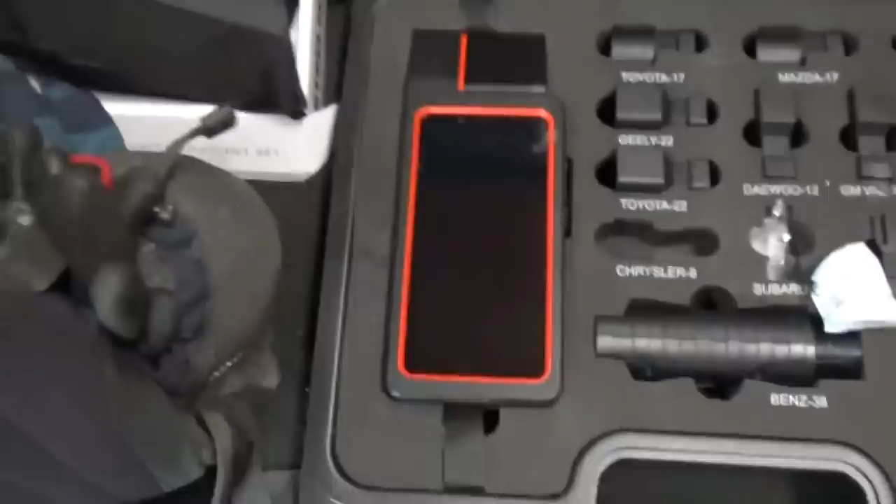So this thing looks like a cell phone - this is a Galaxy S9 Plus. This is the Launch X431, the Diagun IV. It comes in this nice case with all these adapters.

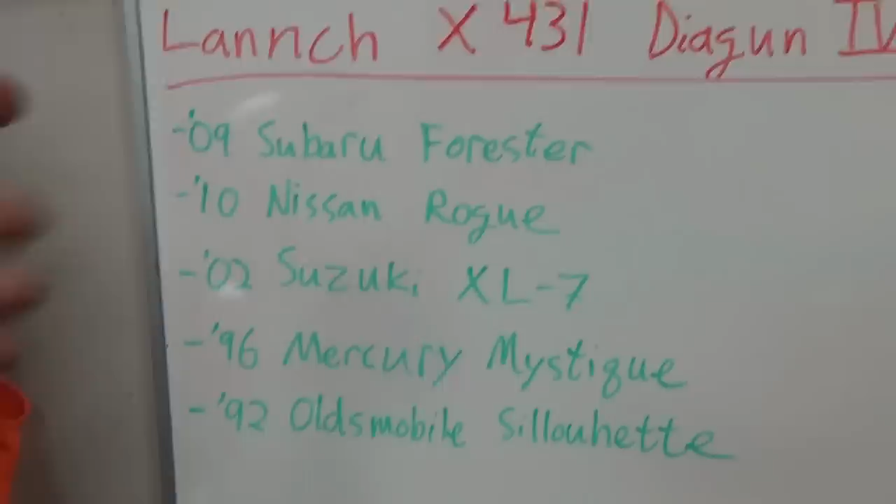Now, my question is, can you use this thing on something older than a 1996 vehicle? Because, like an Autel for example, it comes with the same adapters, but the software won't let you use it. So what I want to do is try it out on these five vehicles: a 2009 Subaru Forester, a 2010 Nissan Rogue, my own 2002 Suzuki XL-7, a 1996 Mercury Mystique, and a 1992 Oldsmobile Silhouette that's been parked in the lot for a couple months now. I haven't had time to get to it, but I'm wondering if the Launch can talk to an older GM vehicle, something older than a 96.

So let's get the scanner out and play around with it.

Alright, so it's exactly like a cell phone. It's an Android phone. You turn it on by holding that button. Here it's booting up. So we have a 2009 Subaru Forester here.

Artyom brought it over again. Yeah, this time the rear brake pads were seized. Just call it a lemon. Come on, it's a lemon. Okay, he calls it a lemon. It's here very often, but it gets some places. Hasn't left you stranded yet, right Artyom? No, not yet. Well, actually in Montana it did, with the clutch. Yeah, it did, of course. I learned from experience.

So, set the camera up on a little tripod here. The Bluetooth dongle is in this holster. Here it is, and it looks like a cell phone.

Pretty cool. So let's boot that up and find where the OBD2 connector is. Alright, here it is, so plug that in. It has a little light just to make sure you got power. Let's hop in and see what this thing can do. Let's have the key on. Alright, let's jump right in.

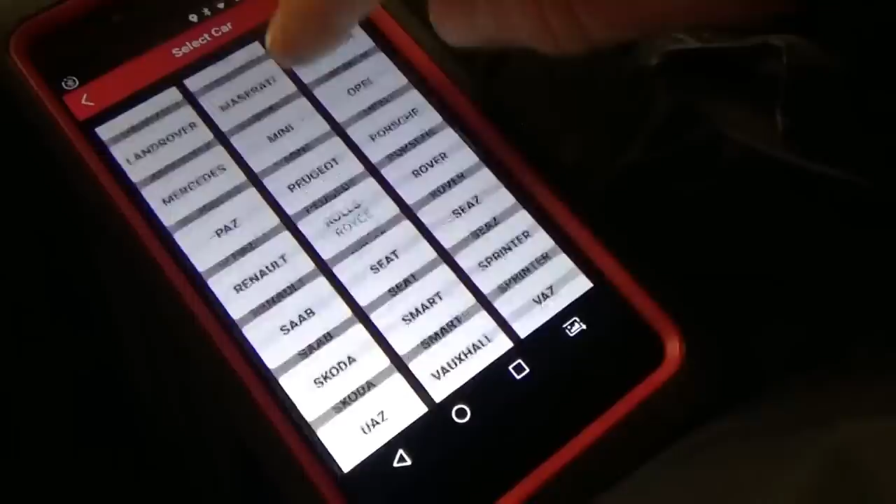Alright, diagnose. And so we've got common - these are like your most recent cars: American, European, and Asian. So let's go for Subaru.

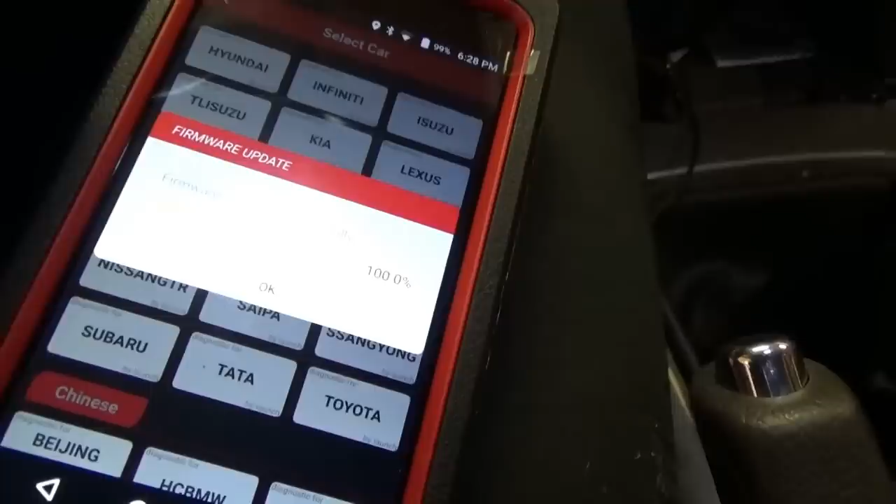Your firmware is updating. This may take several minutes. Please keep the connector powered up. Okay, so the first time you use it, it actually needs to update the firmware that talks to the Bluetooth dongle. It looks like it's going pretty quick. We'll be right back. Well, that took about a minute - firmware installed successfully. Okay.

So now it's going to talk to the car through the 16-pin socket. It read the VIN - Forester 2009, that is correct. Try to minimize the glare so you guys can see it. Let's see if you can hold it like this and poke around with your finger. System info - yes, correct.

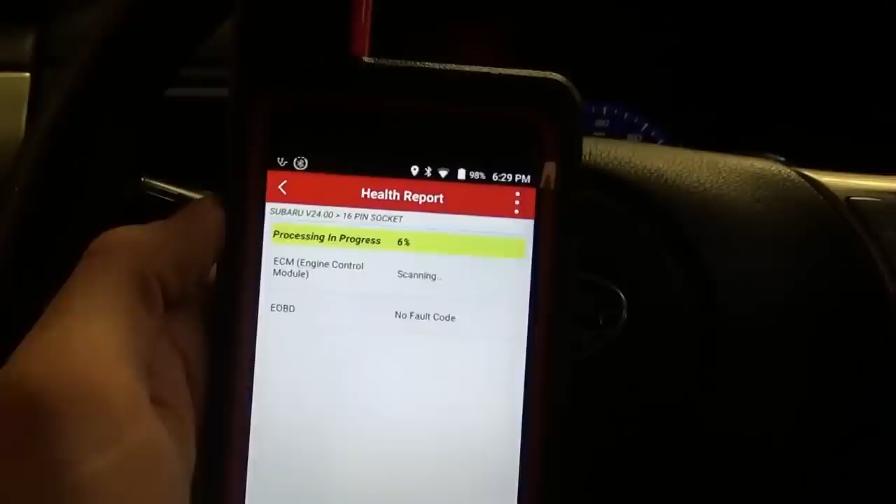Alright, health report, system scan, system selection, immobilizer, advanced function. I don't know, let's start with the health report and see what that does. Okay, so this is kind of like the Autel, scanning every module in the vehicle. I'm wondering how long it's going to take on a Subaru, which is the base model - it doesn't have 100 computers in it, it should have like 5 or 10 or something.

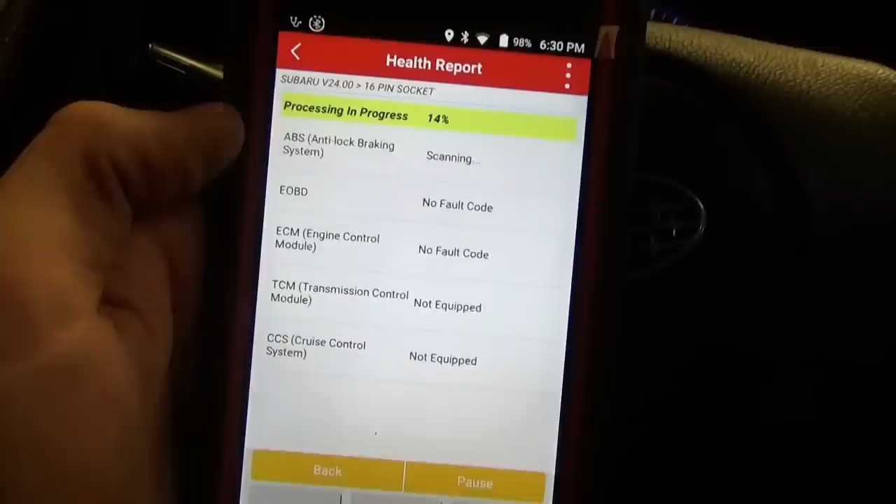So, engine control module, no fault. Does not have a TCM because you shift it yourself. Cruise control system, yep, not equipped. So it's good that it checks for every module and actually tells you if it's equipped or not. I do like that. We have 3 faults in the ABS - I wonder what that is. We'll take a look here shortly.

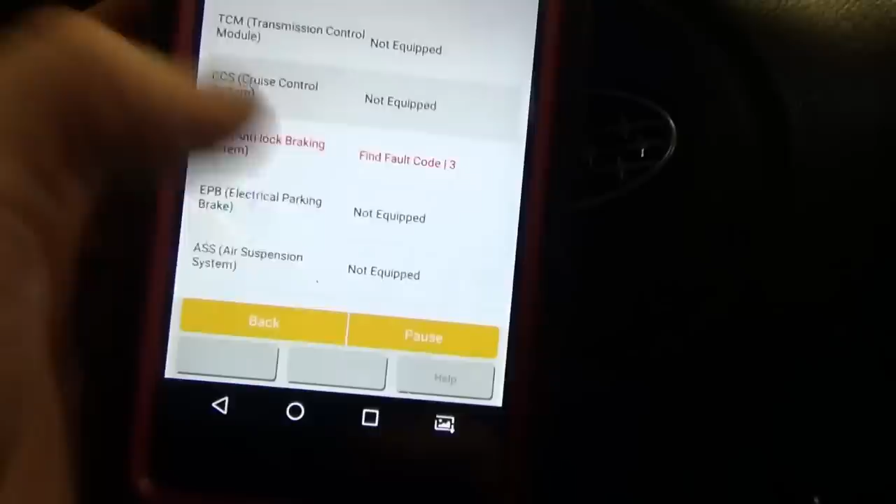So a lot of this stuff - air suspension not equipped, electrical parking brake not equipped, power steering, TPMS - okay, no fault code. So let's pause it.

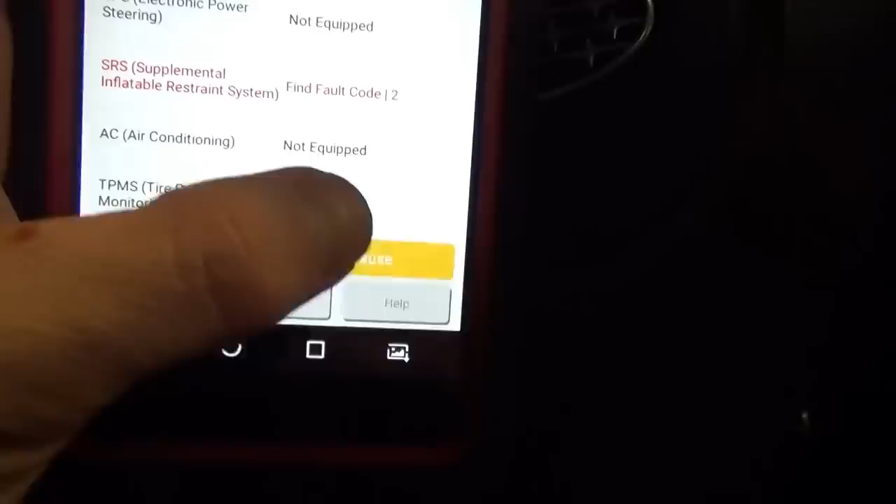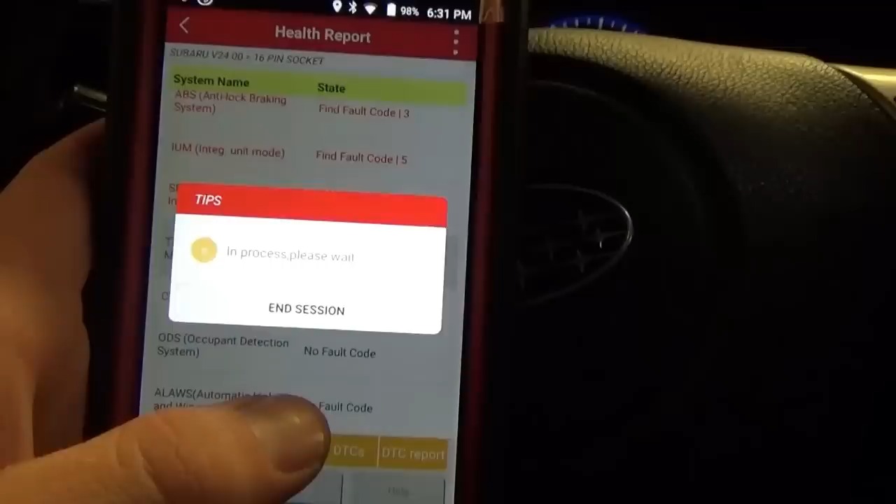Okay, let's look at the ABS. Processing in progress. I just want to look at the ABS. Come on, is it still scanning? Wow.

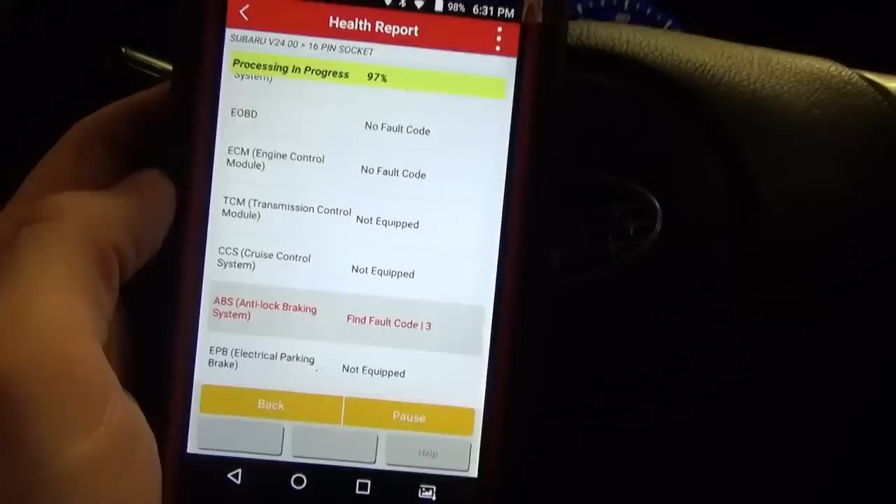So it scans for every possible system that a Subaru can have. Okay, 100% done, right? Sure have a lot of trouble codes there, Jim. Well, I don't trust computers, man.

Okay, so now we can click on ABS, read fault codes. Steering angle sensor malfunction, VDC control interruption because of engine instructions, power supply failure. Interesting.

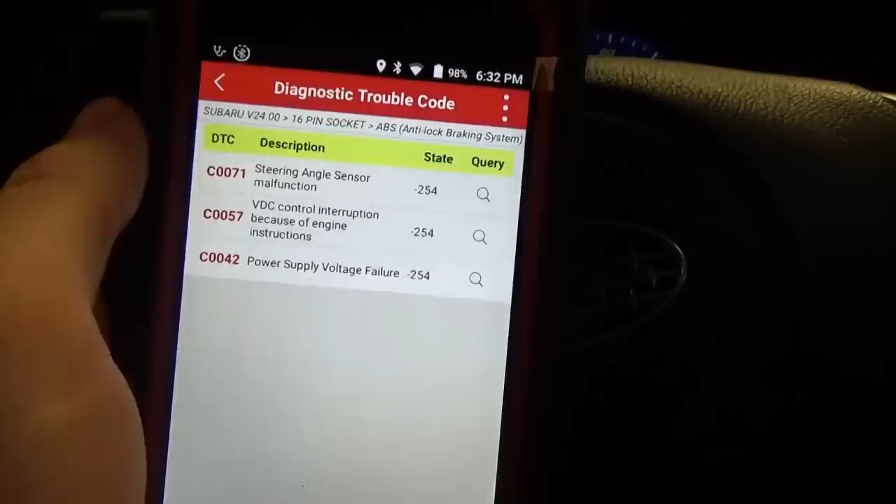Let's see what we can read in the data stream. So if we select the whole thing, so you can select it by page, I guess. Select page, why can't we select them all? So now it shows it by page. Okay, and we can scroll over 3 and 4. So that's, I guess, okay.

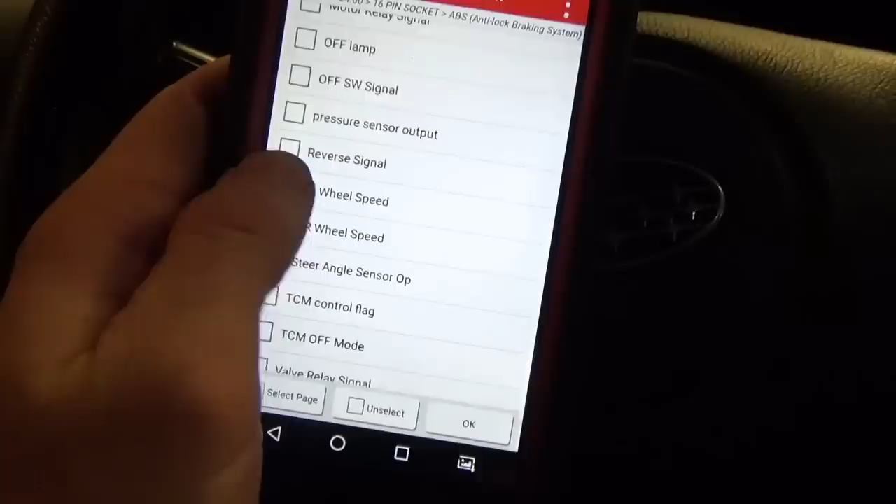Now if we graph this, let's say we just want to graph the speed sensors. So we can go back, unselect everything, and just do front left, front right, rear left, rear right. So they're alphabetical. Okay, so now we have 4, and I want to see what the graphical picture looks like. So we're at 0 and 0. This is actually not bad.

So we have 2 graphs per page. I'm wondering if we can do anything with the... oh, we can zoom in on one. Okay, that's cool, min max. So we can adjust the scale on it. I like that, so it either auto scales or adjust the scale there.

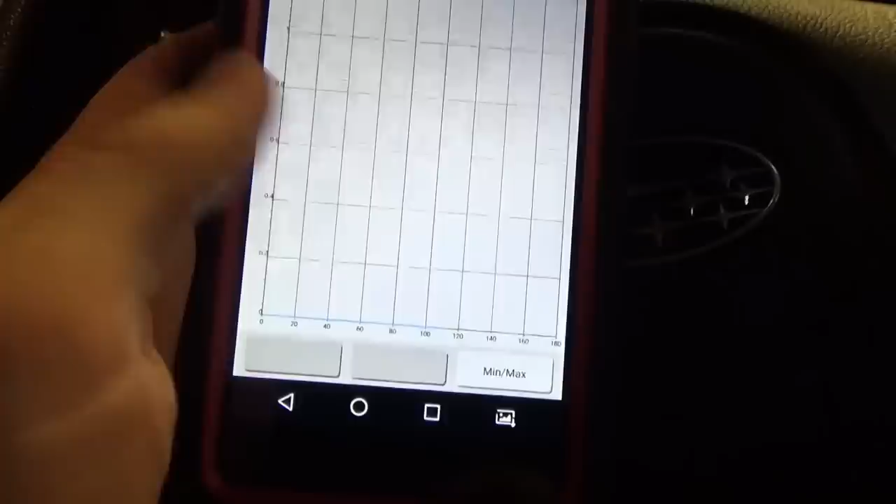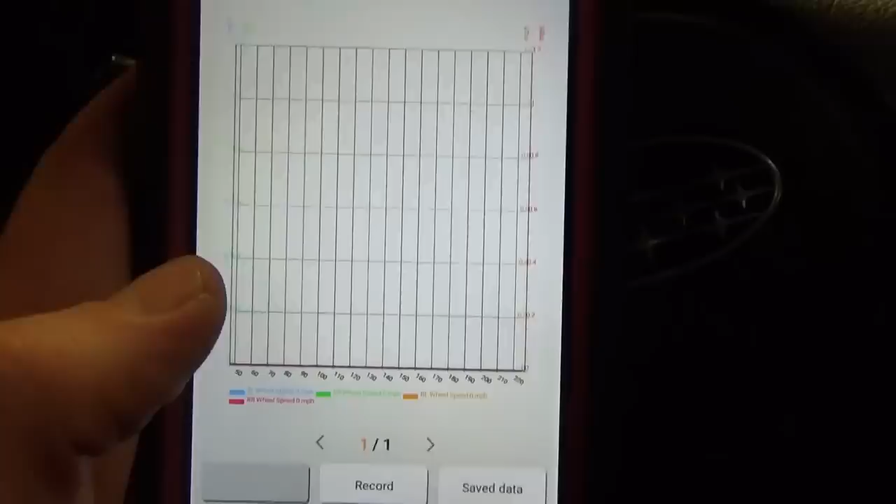And I'm wondering if we can adjust the time base. I don't think so. Alright, we can combine them. That's cool, so all the wheel speeds on one graph. And that's actually neat because you'll see the lines on top of each other until one sensor drops out. So that could be a useful feature if you're looking for a faulty ABS sensor or a tone ring or something. Okay, I like that.

So it's reading data just fine, pretty fast refresh rate. Let's go back. What else do we want to do here?

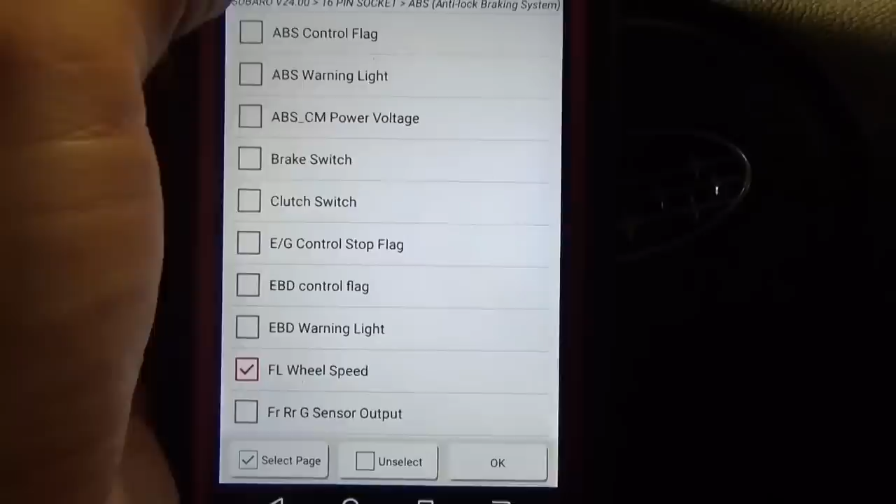Let's just clear the codes, see how fast that is. Okay. Read fault code, no diagnostic code. Okay, great. Diagnostic results, exit the current function first. Back, alrighty.

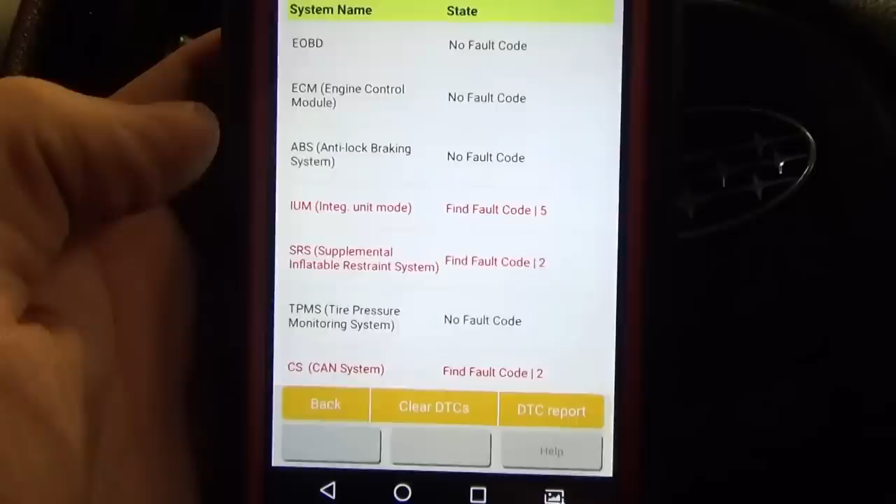So will it go back to our health report now? Yes it does, that's nice. And it says ABS, no fault. I like it. Now let's see what else he has in there.

Airbag codes. Okay, fault code, side airbag right hand failure. ODS communication error. But your airbag wasn't on, was it, Tim? Never? No. Okay.

So airbag status, seat position sensor. I don't know, clear it out, see if it clears. It could be a stored code. Alright, no codes there.

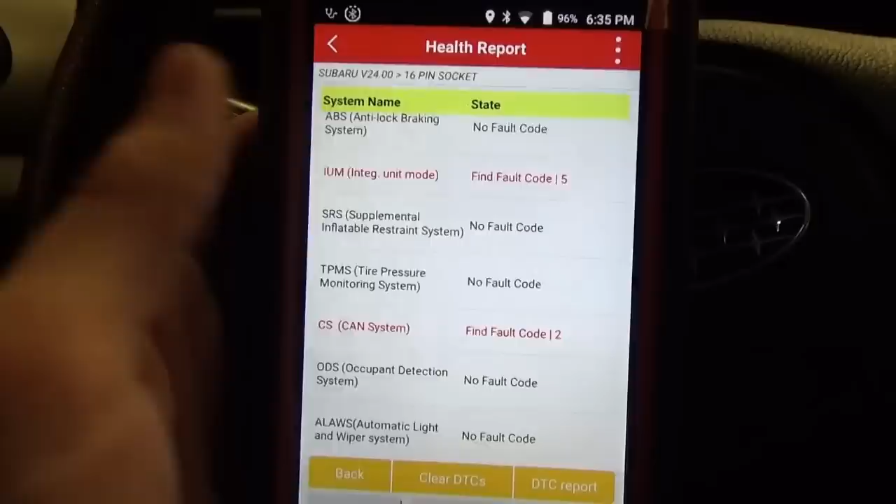Go back, what else do we have? So far so good. What if we clear all the DTCs here? DTC report, how about that? Well, we still have some stored. What if we click this button? Fault normal, so those are normal, and these modules have faults.

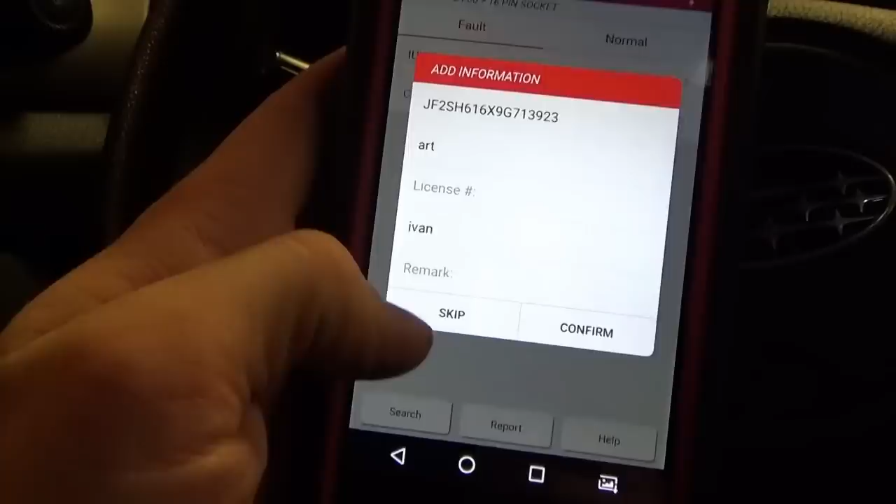If you click report, add information, type his name in, license, whatever, tester. Okay. Let's see, down arrow, and confirm. Vehicle diagnostic report, Subaru Forester stores the VIN, test time, tester, 16-pin socket, diagnostic results.

Okay, this is awesome, I like it. So now we can go back to, if we save the report. So documentation is really key. That's one of the reasons I really like the Verus is it has the vehicle history and it stores every code that you scan and also the actual data PIDs.

And I don't know, I guess we can send it to them, right? Not found the appropriate application to share. Okay, so they haven't gone that far.

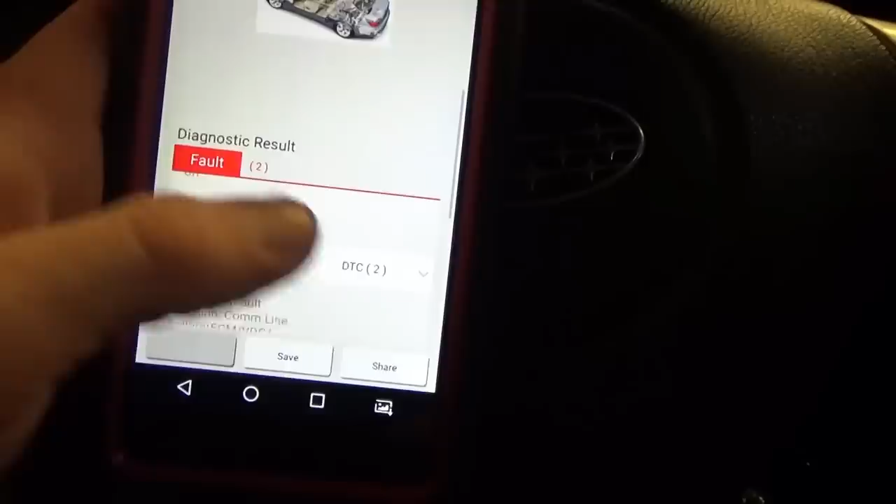Okay, and we can see here all the DTCs in the IUM. We got battery codes, CAN high speed counter abnormal - kind of logic codes I guess, CAN high speed bus off, B0301 refer to manual. Cool.

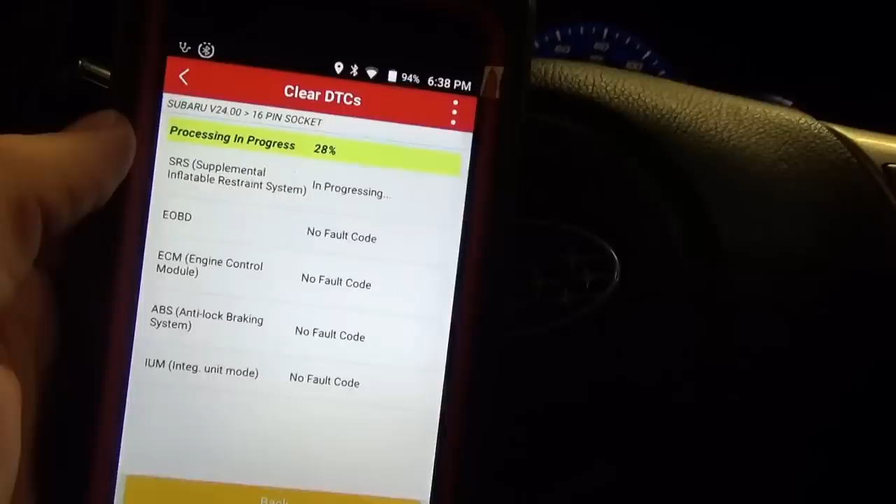If we do clear DTCs, let's just do that. Clear all system fault memory. I'm wondering if it's going to clear the ones that have no fault codes - will it reset the engine computer? I'm going to try it. So that one stopped, and if it says no fault code, I don't think it does anything because it would be way too fast to do all that. So now we have no fault codes in anything.

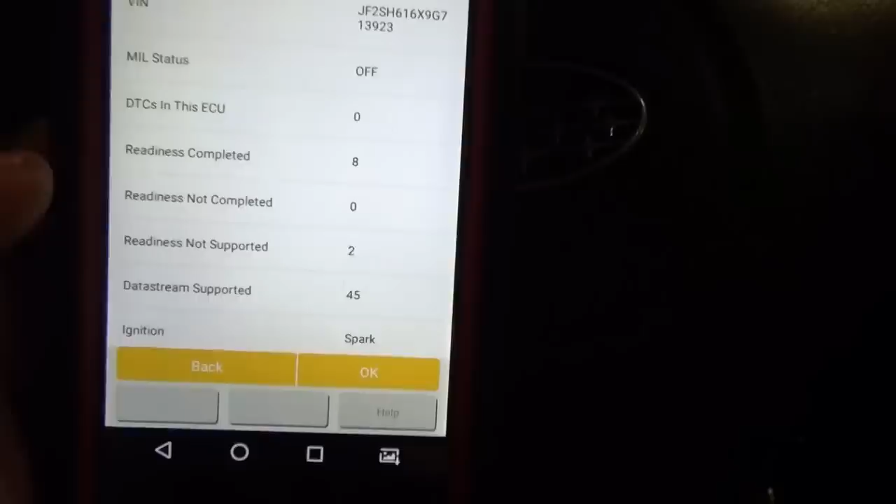Let's go into EOBD. I want to see if we can look at our readiness monitors. Readiness completed, 8. Perfect, so it didn't touch the engine computer. Mil status off. Okay, great.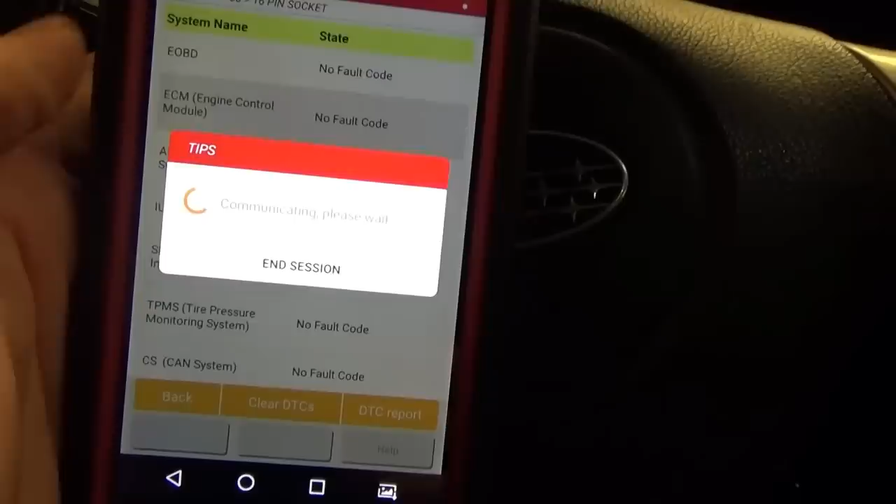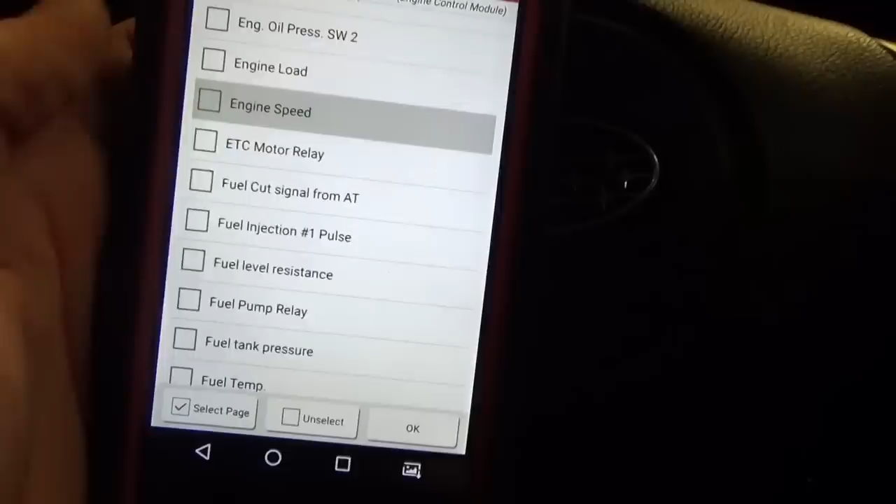Last thing I want to look at is, let's go into ECM. I want to look at the update rate for the data going through the OEM Subaru system. Yep, 2.5. Read data stream. I don't know, air fuel sensor. Let's do airflow sensor voltage, camshaft position, coolant temp, engine speed, and let's do the mass airflow. There we go, okay.

Alright, I guess nothing's changing now. Let's go into TPS - throttle, motor, throttle opening angle. How about that? Okay, I'm going to press on the gas. There it is. Let's do graphical.

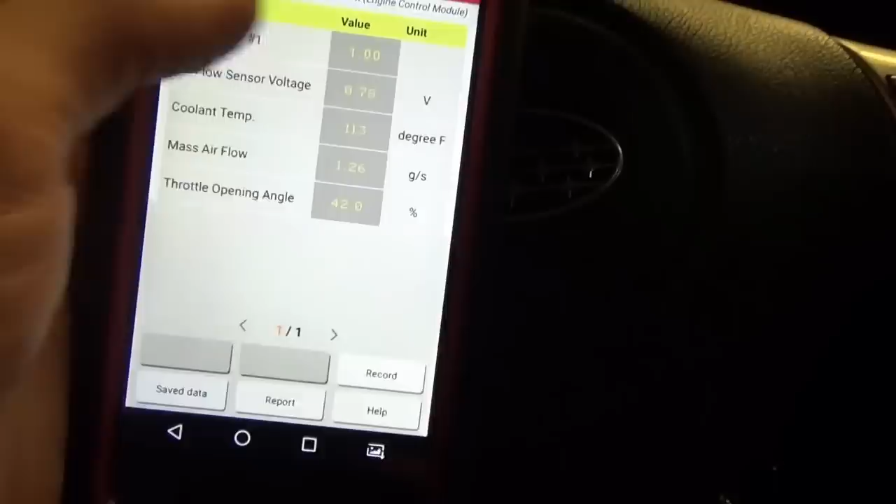Coolant temp, mass airflow, TPS. There it is, so opening it slowly. I'm flooring it, so that's 100%, and back down. So pretty nice update rate.

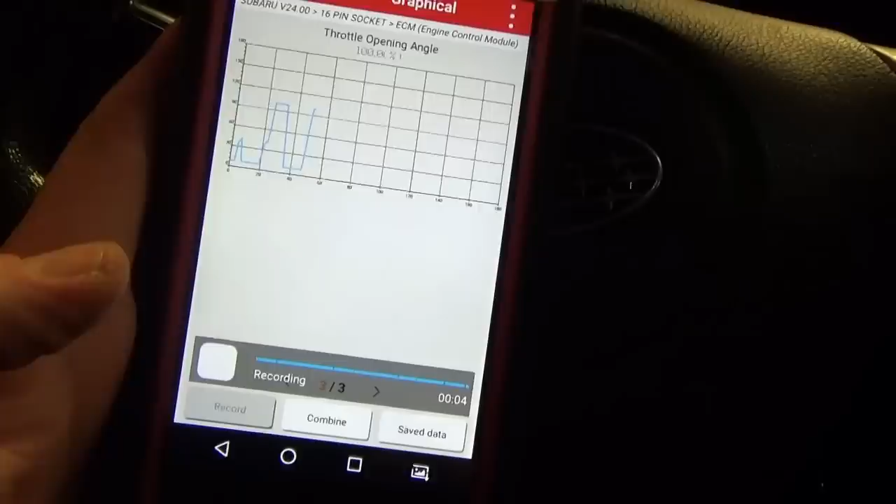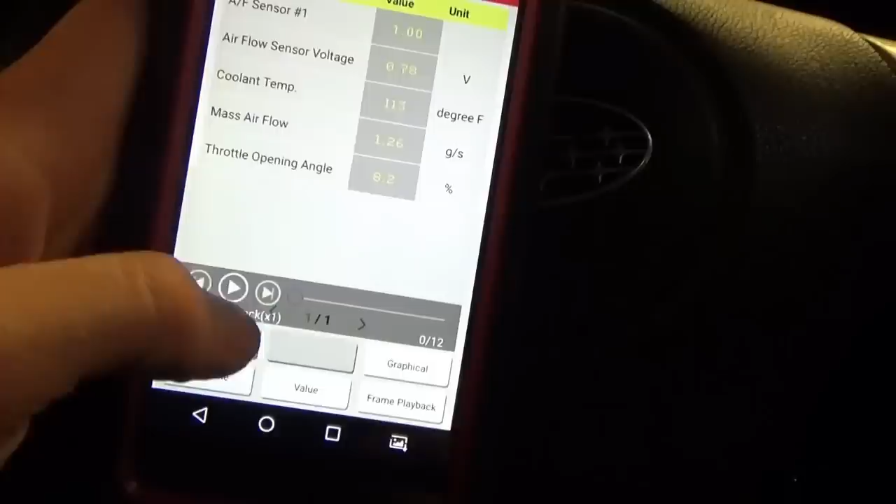What if we do record? So now it's recording. Okay, and we can stop the recording. We can name it, confirm. Record successfully. Okay, and then if we go save data, there it is. So those are the reports, and this is the data record. So if you do this, select all, submit. Okay, now we can play back.

So graphical, let's look at the TPS, see if it plays it back. Playback, 1x. There we go. Is it going to draw it? Yes, it is drawing it. Cool.

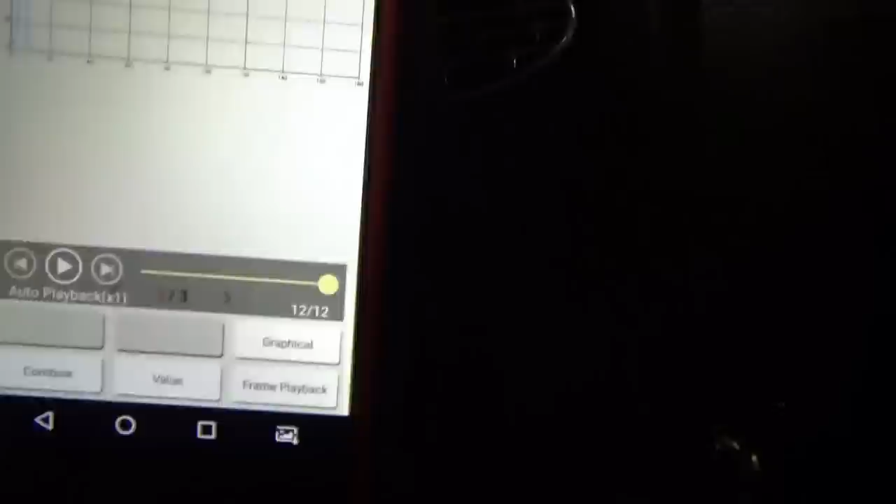I like it. So in this case, if you want to record data, you have to hit the record button. Unlike the Verus, where it's always in the buffer and you hit save data and it just saves as much as it has. That's a nicer thing, but if you have this capability and want to record your test drive, this is actually pretty handy - much better than at least the Autel, my older one, the MaxiDas. That thing is pretty primitive.

So far, so good. On the Subaru, I'll give it an A. For giving a grade without really doing a diagnosis, it's hard to say, but so far it's quick. It scanned every module, had a very nice report for DTCs, and you can save stuff - save data, save reports, send it to a customer. That's key, I think I'm going to use that feature quite a bit.

Let's move on to other vehicles. By the way, before we're done with the Subaru, of course we want to do some bi-directional controls. What kind of scanner wouldn't do bi-directional controls? That's why you buy expensive scanners, is to have that capability - not just to read codes or look at data, you want to command stuff and activate it.

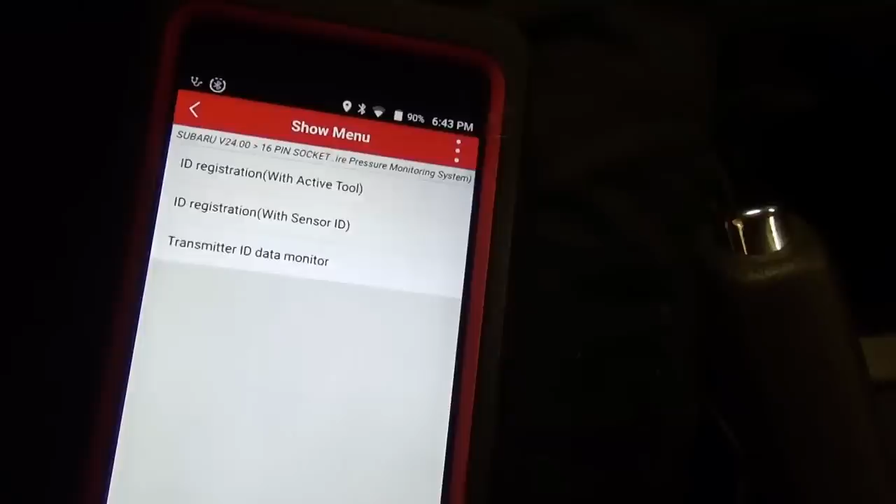So on Subarus, for example, I'm in the TPMS menu, and let's see, we can actually do registration of the TPMS sensors, just like the Autel, and I think the Snap-on can do this. So that's good.

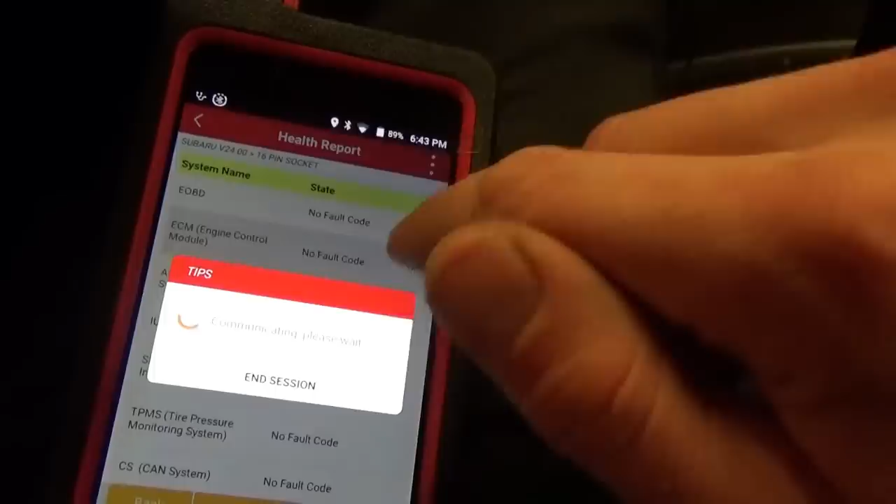What other bidirectional thing can we check? Let's go to the ECM again. Now in Subarus, they're kind of weird - sometimes they don't let you activate components one by one. It's kind of like a test mode, and it just does its thing, activates all the components at once. Just kind of weird, but let's see what's in the special function. System operation check mode, that's what it's called on a Subaru.

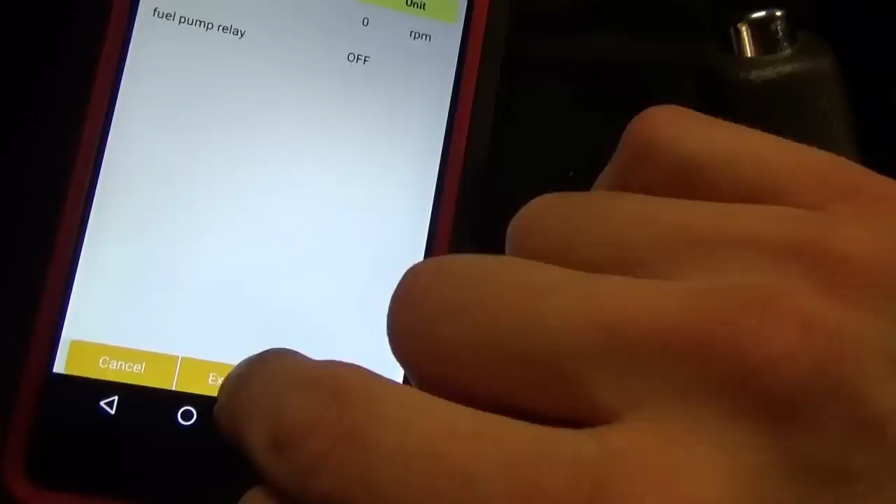So if we do that, let's do fuel pump control - on, off, drive. Turn ignition switch on with engine off, yep. Active test, so cancel, execution, stop. Execution - there it is, fuel pump kicked on. Off, on - toggle it. Awesome, love it. Stop. Great. Back out of here.

Start the engine - so you can actually turn the fuel pump off when you're running to relieve the fuel pressure in the system, if you want to disconnect the fuel rail. That's pretty neat, I like it. So far, awesome.

Alright, up next I got the 2010 Nissan Rogue in the garage. Let's try the Diagun IV on that. Just to note, this has been on for 3 hours and the battery life is about 80%, so that's pretty good, like a cell phone. Let's jump in.

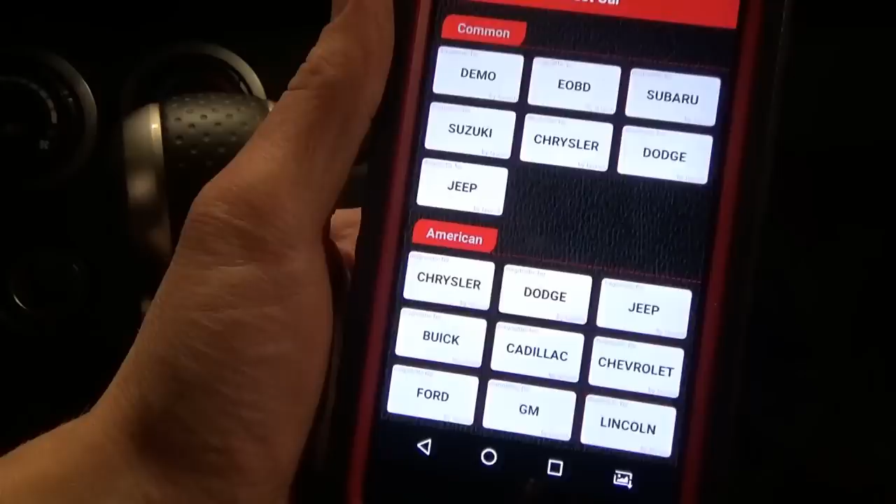Alright, keys on. Let's go to Asian, Nissan. I'm curious to try this thing on some European cars, but I don't own any. But so far, honestly, I'm pretty impressed.

So automatically search, let's do a health report, see if we can talk to all the modules. Let's execute the test.

Now, I am very familiar with the tools from Autel and Snap-on, and I know on the Autel, on this vehicle particularly, it could not talk to the ABS module, which I found kind of strange. The Snap-on is fine on that, but the Autel just said nope, can't talk to it. This thing should be able to talk to it, and I'm also curious to go into the CVT, since we know some of the features that should be there is resetting the TCM, checking the CVT fluid life. Those are some key things you want to do with your scanner.

Now let's see how this thing is. Sure is taking a while, but then again, it's trying to scan for every possible module in here. Ooh, we got one fault in the TCM. Interesting.

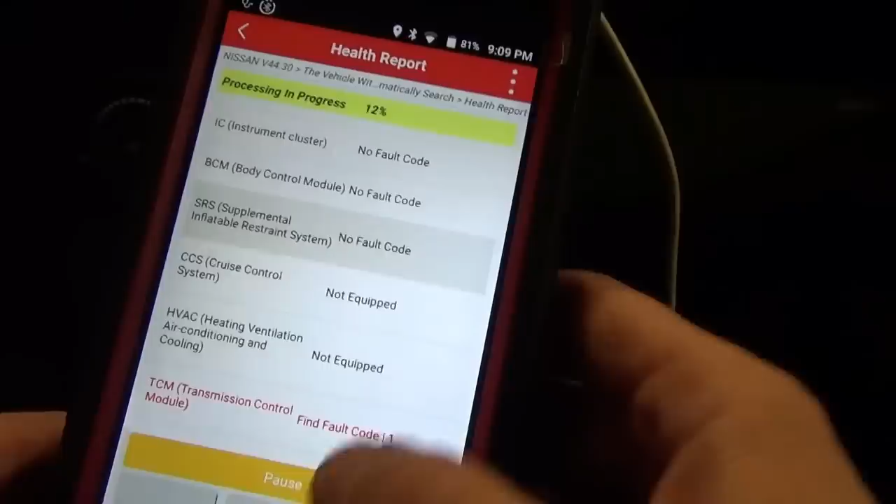Let's see here. ABS, no fault code. ECM, no fault code. Instrument cluster. So let's pause it. Okay, so it's paused, that's good. Let's go to the TCM. Read fault code.

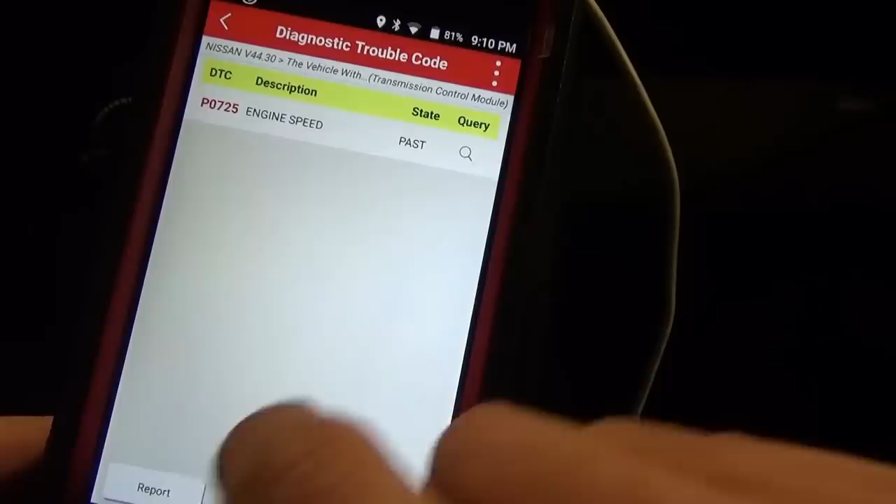P0725, engine speed past. So we can do a report. Confirm. Just to save that.

Okay, let's go back. You know, if it's a past code, it's not a current problem. So this car, remember we replaced the CVT, the actual transmission, at 185,000 miles. Now it has 215,000 miles, so it's been about 30,000 miles. Absolutely no issues, runs great.

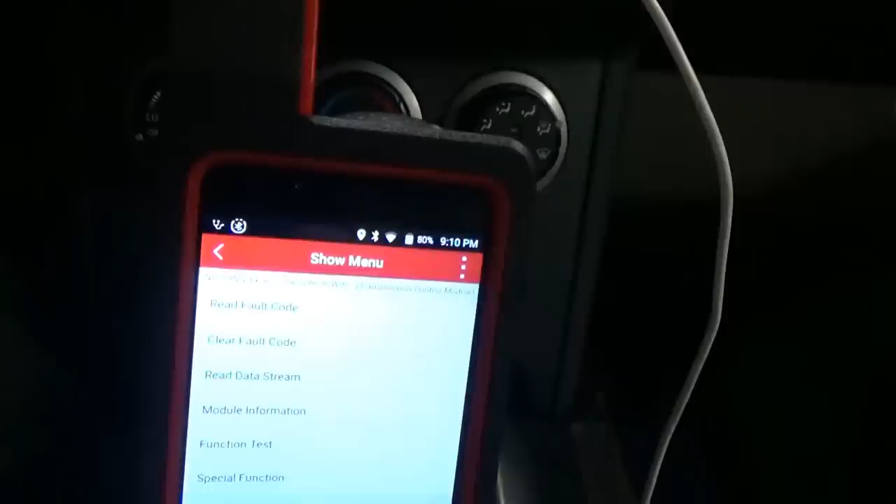You know, no trouble codes or anything, so I don't know where that code came from. But I'm interested in, first let's clear that code out while we're here. Okay. No DTCs, good. Function test and special function.

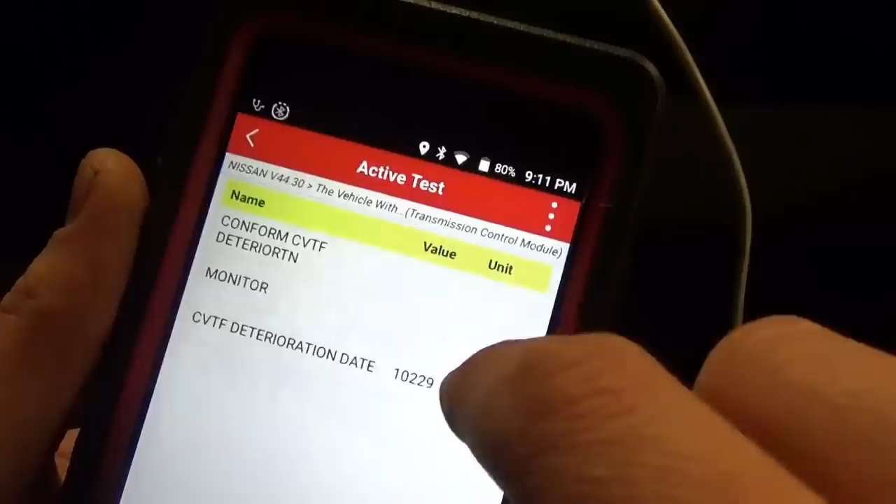So here we have engine brake adjustment, confirm CVT deterioration, and calibration data. So let's see what this guy is. So the value for the CVT fluid life just gives you a number. That's the same as the Autel. Let's see, can we click on any of these?

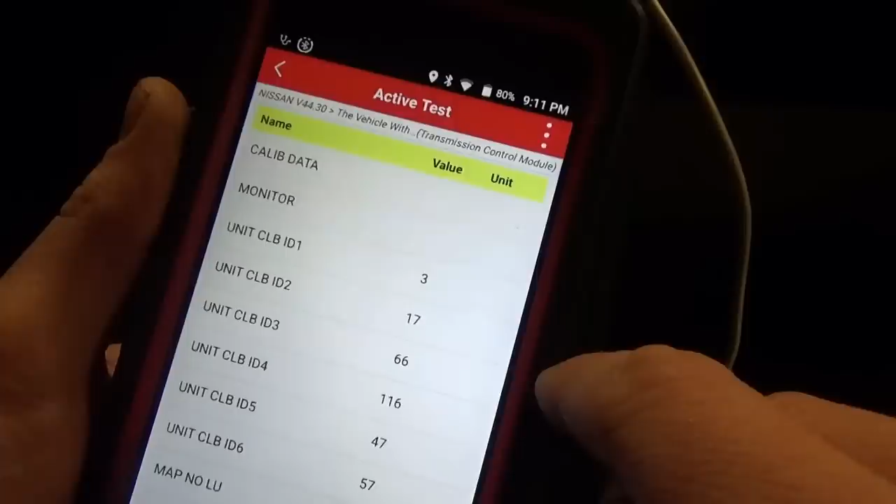Monitor. Calibration data. So there's the actual data for all the pressures that it's learned.

So we can actually adjust this thing for smart engine braking. So right now it's at 0, the default. We can go up and down. Now adjustment, +1. Down. Now adjustment, 0.

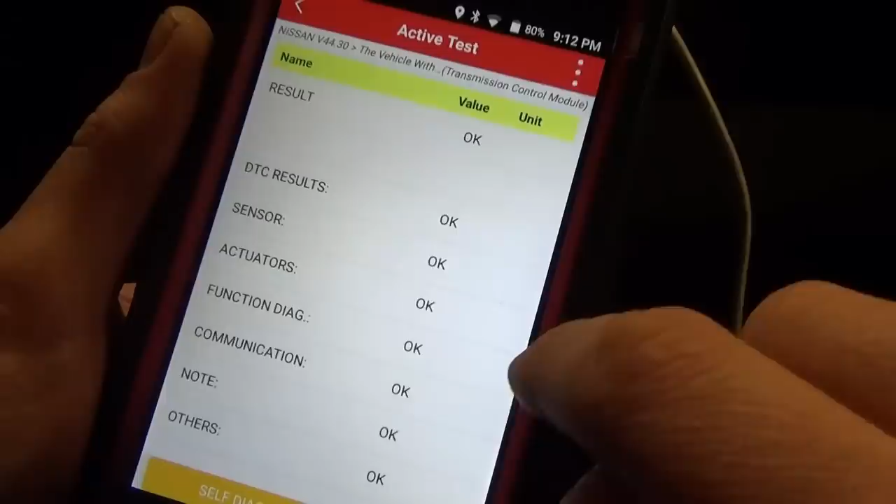Okay, that's cool. And where is... self-diag. If you erase the self-diag results, this test may display false results. Okay.

I don't remember what that function was called when we initialized the TCM. The Snap-on, I think, did it. I don't remember if the Autel had it. But basically, that's not what we want.

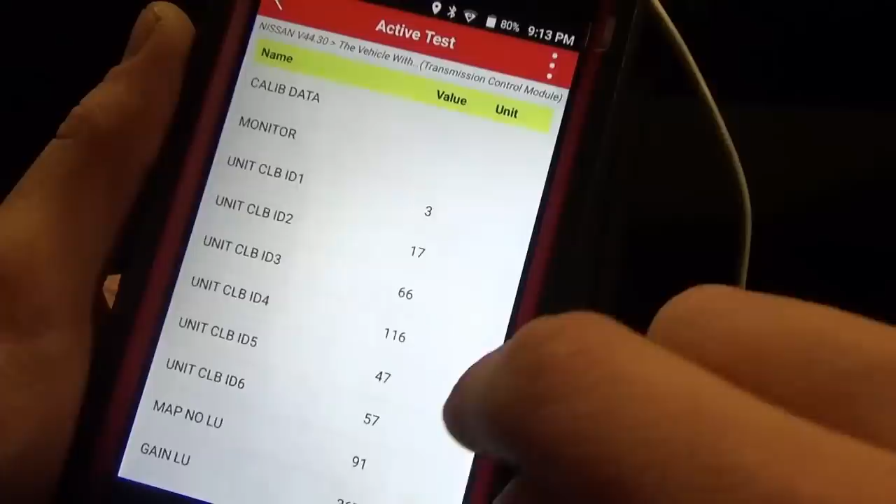This is just data, there's no erase the data. So with that, wonder where that function is. I'm gonna have to fire up the Snap-on to double check.

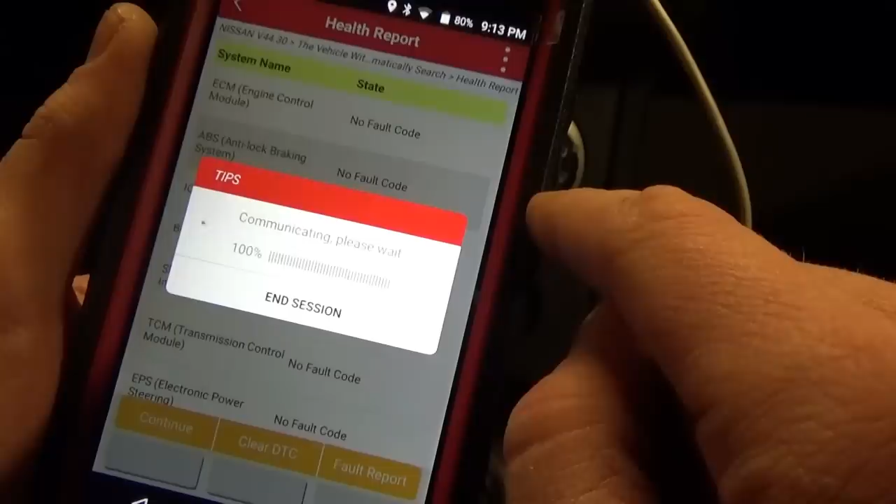Let's check the ABS just to make sure we have communication and good data stream. Let's just do main signals. Uh-oh. Uh-oh.

Where's the data? This is why we check these tools. This vehicle can't support this function.

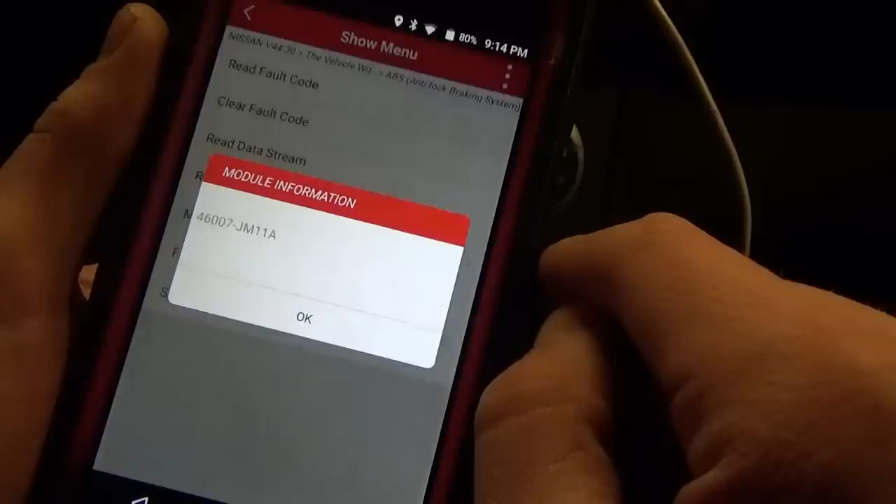So we can read codes. Read the module info. So that's a no-go.

So we're already finding some holes in this thing. So the Snap-on can do the ABS stuff no problem. This thing is kind of falling on its face here. No freeze frame data obviously, but can't support this function. This is live, this is no BS here.

Little disappointed, I thought this tool would be 100% awesome, but now the grade for the Nissan capability is going downhill. Anyways, what else can we do here? EPS. Let's just back out, do system selection.

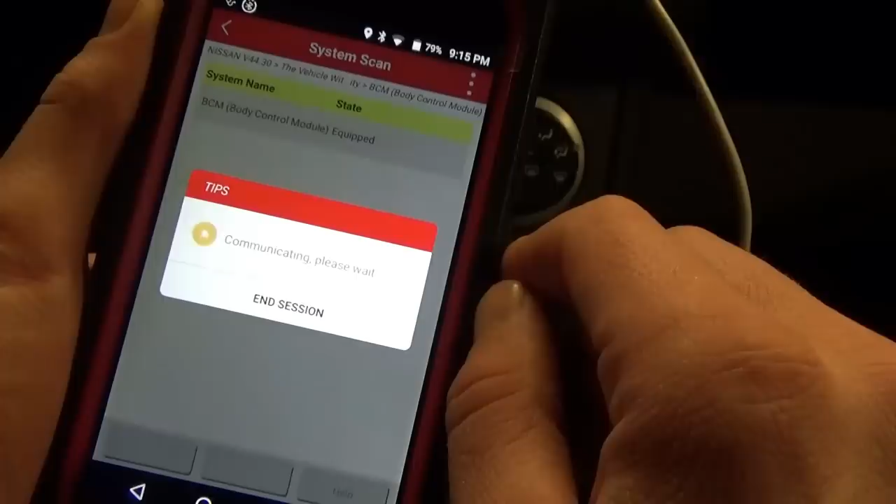BCM, body and vehicle security. So where's the TPMS here? Equipped. Okay.

Special function, so we can do all this stuff. So the TPMS is actually in here. So if we want to read data stream, we actually choose the air pressure monitor. And there we go, there's all the PSIs. They're not awake right now.

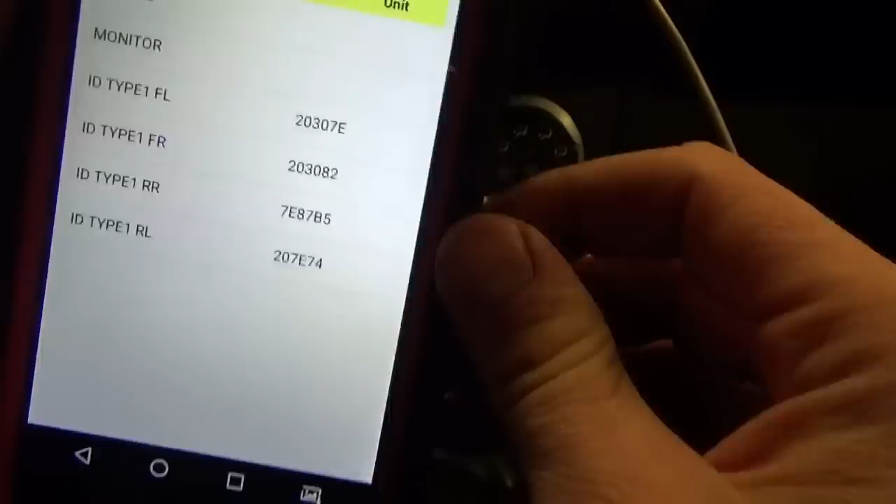But so that works. Now what if I want to register new sensors? You can go to, let's see here, special function, ID read, ID register. So they're all kind of lumped together. They're not under TPMS menu, but we can read the tire pressure sensor IDs right here. So that works, okay.

Anything else you want to test out on the Nissan?

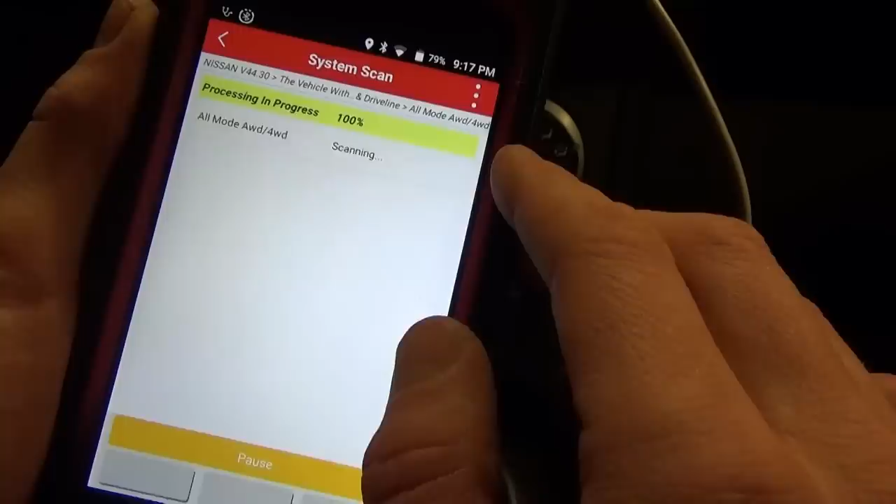Transmission and driveline. TCM. All mode four-wheel drive. I don't know which module it has in here. Equipped. Okay.

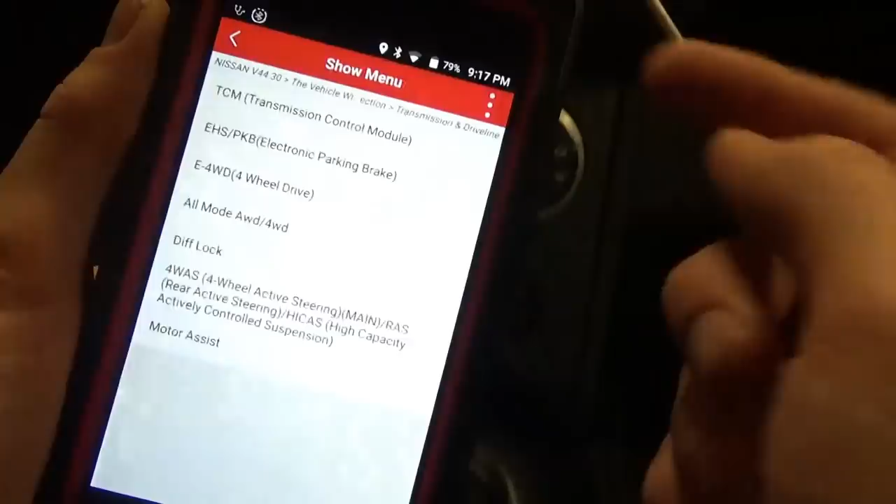Let's just do that. Okay, so we read data from the all-wheel drive module. Good deal. I mean, you can poke around here and try to see what it can do, but we just want to get an overall feel for it.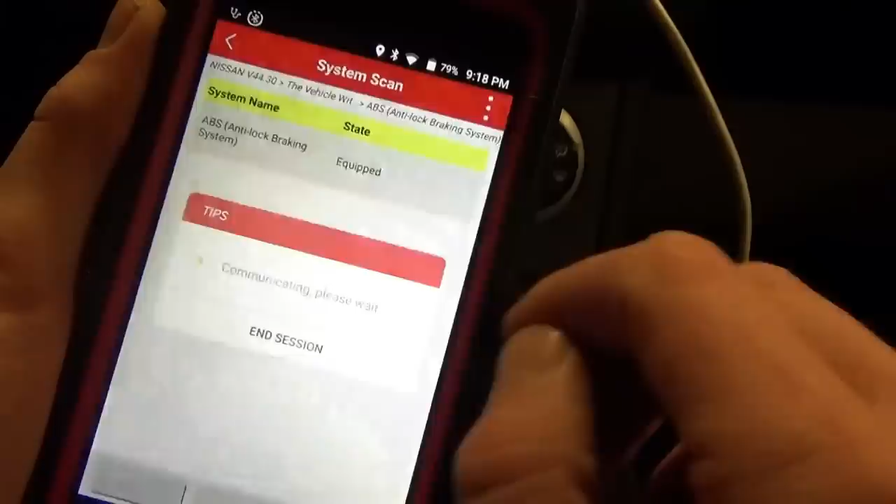I still want to get into this ABS and read data. It says it's equipped, I can see the module. Equipped. But it should at least be able to read some vehicle speeds. I mean, that's input signals, main signal selection from menu.

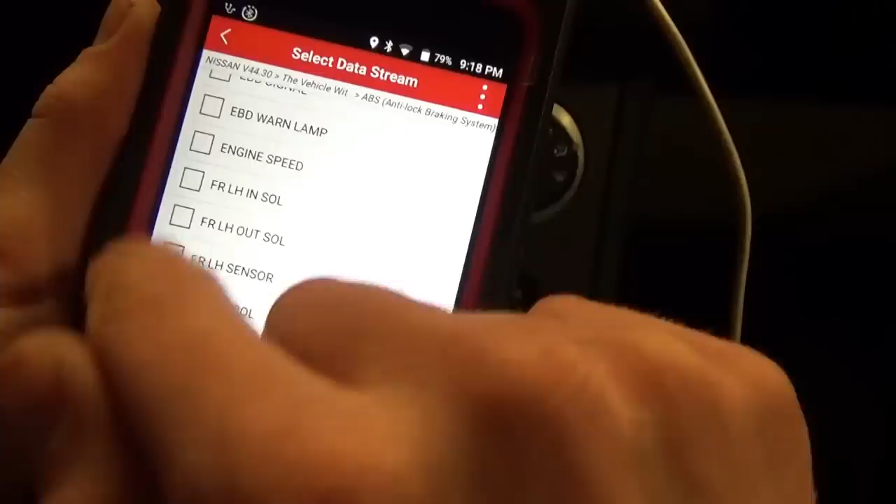Wait, well, so wait a second here. Where's the solenoid, sensor, left hand sensor, front right. Where's the fourth one? There we go. Okay. Oh, well, there we go.

So my question is, why couldn't it do that from the report? That's kind of weird. Special function, steering angle sensor adjustment. Adjustment complete. Well, I guess we just did the adjustment. Good thing the steering wheel is in the straight ahead position.

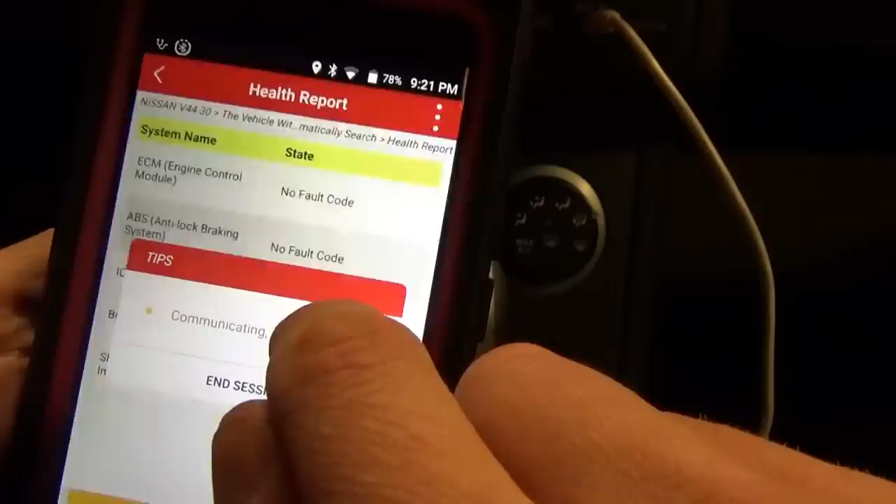Back from the health report, let's go back into ABS. Okay. Data stream. So the menu is different here. And look, no monitoring data, no monitoring data, no monitoring data. So we weren't wrong. From the health report, you don't get anything.

But if you go to system selection, it's different. What the heck? That could throw you for a loop. So that's one thing to keep in mind. If you really want to get into a system, you know, this will read all the fault codes, but you won't necessarily have the full functionality, which is very strange.

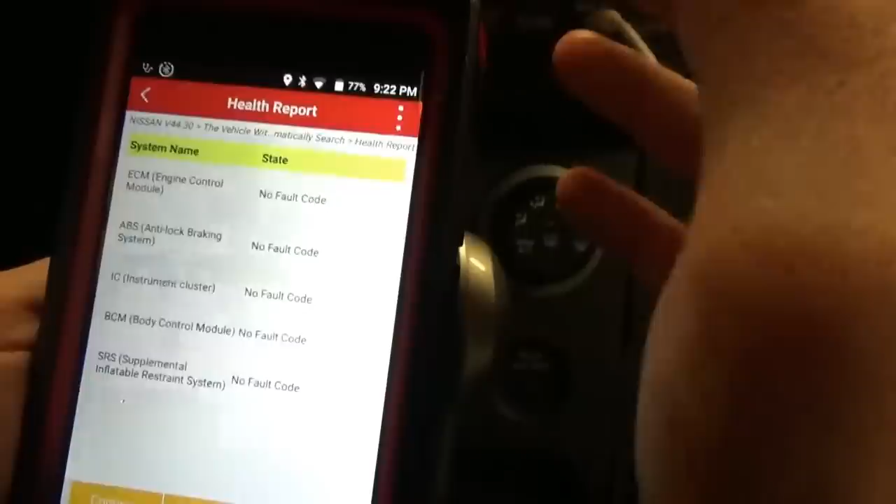So if you know that little tip, then you just go in here, brakes, ABS, and it should be the same module. It just doesn't make any sense to me. Very, very strange. So these are different. Selection from menu. ECU input signals. It goes right in.

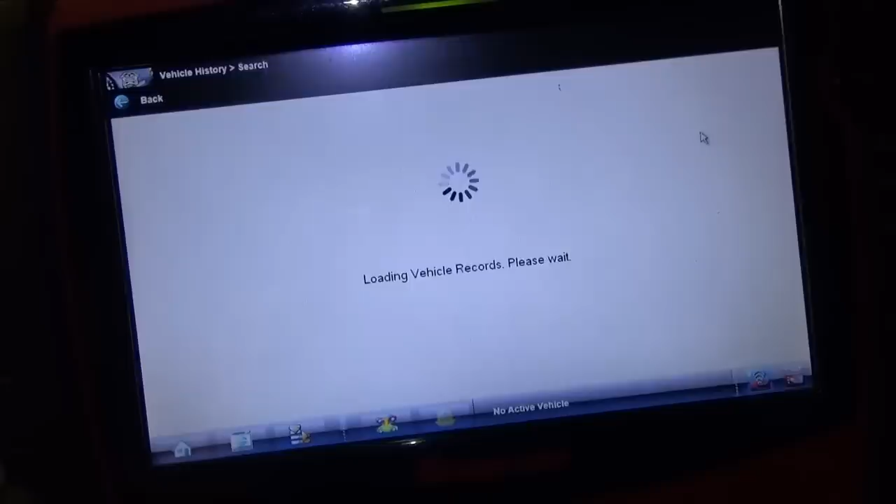Alright. I don't have a choice. I have to try the Snap-on and see if it has that CVT reset procedure. So in our history you can search for Rogue, and it's a 2010, so I guess I have it in here twice. Doesn't matter which one we pick.

Okay, activate. Scanner. All right. Transmission. Work support. Initialization right here. Exit initialization, select calibration data.

Print copy data, before and after comparison will have to be done. Confirm that the initialization was done successfully. TCM needs to be initialized when replacing the automatic transmission and not the TCM. So this is what we did. We did the initialization.

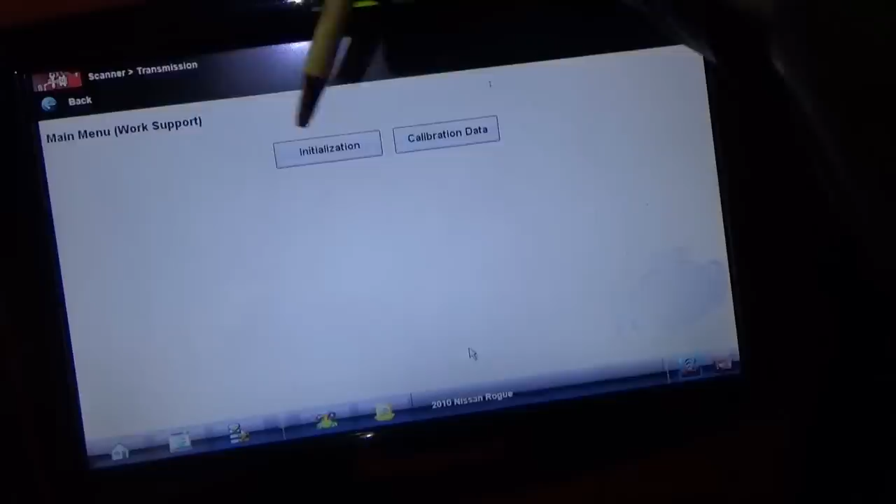The Launch did not have that feature. But the Snap-on doesn't have fluid life. Which one would you rather have? I would rather have the initialization, because without this, you put in your own transmission, you're going to the dealer. You're not driving away. So that's kind of interesting. Snap-on does offer that. So that's all I wanted to see here. Alright, well there you go. So one scanner will not do it all.

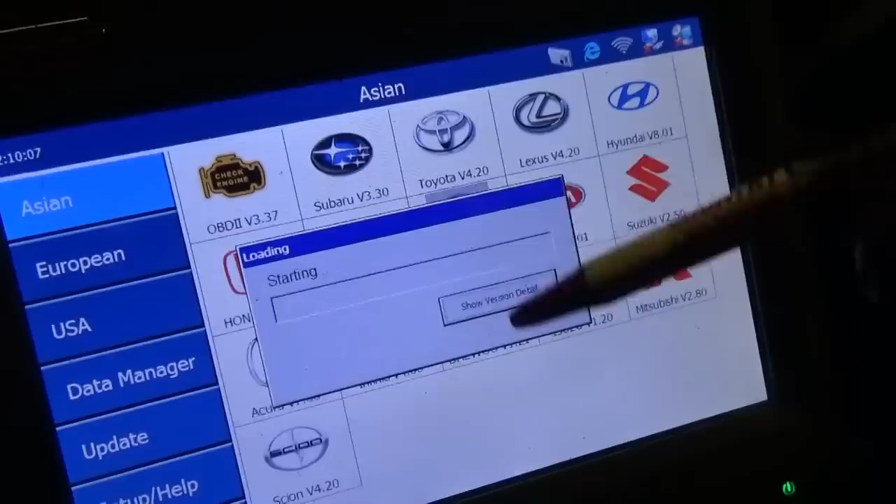Gotta be fair, gotta try the old Autel. See if it has the initialization procedure for the CVT. By vehicle. Just give it some parameters here. I've got the Rogue, and it's a 2010. Okay.

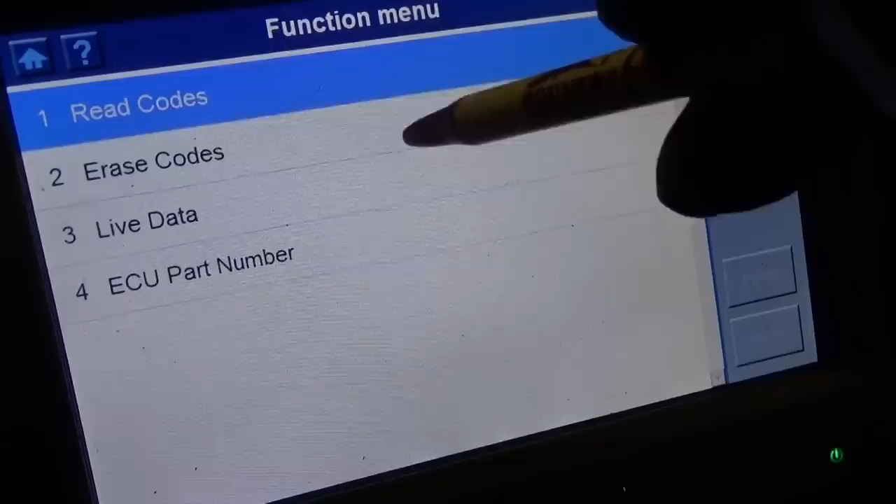Control unit. I'll show you the ABS. Functions not supported. This thing cannot do ABS on a 2010 Nissan Rogue. Can't even read codes. Silly.

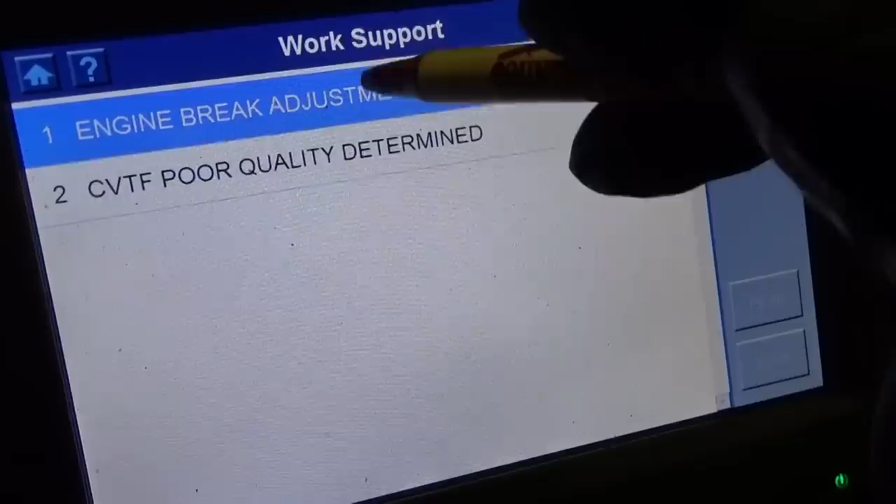Let's go to the ATCVT. Alright. So work support, engine brake adjustment. CVT poor quality determined, so no initialization. We can adjust our engine braking, just like the Launch. So it seems like the Launch and the Autel are using very similar software, and the Snap-on is doing something different. So only the Snap-on can do the CVT initialization routine, unless we missed it somewhere.

Just double check here. ECU part number, calibration data, CAN diag support monitor. This is what the Launch is showing. So we can look at our calibration data, but you can't initialize it. So good thing we had the Verus when we replaced this transmission. And that's all I wanted to show here.